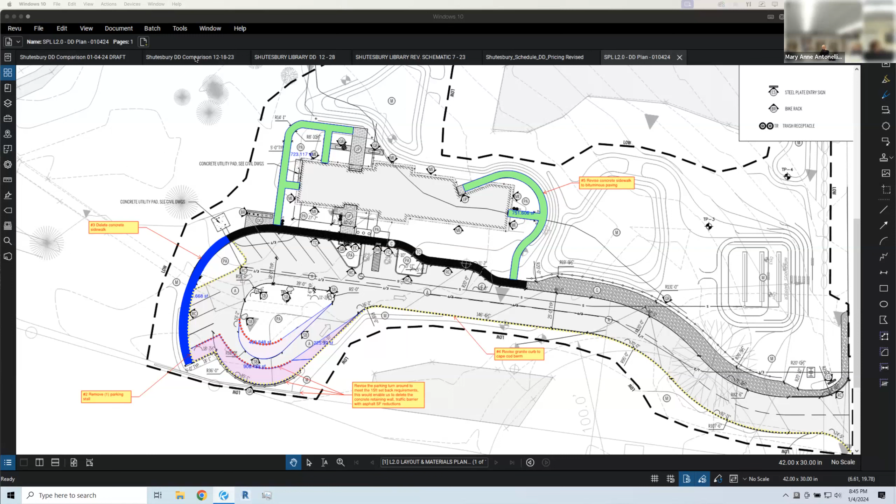Plus. And that's an eligible cost. Why did we take that out? The benefit of that is immediate. Absolutely not, I'm not taking that out. I'm just saying that if we run into issues, we need things in our pocket so we can build the building. I think that's not something we want to put in our pocket - that's a foolish thing.

There's the immediate problem of tenants paying for their electric. You're not gonna get those cells on the roof right away - that's not a viable strategy. You said it, you spoke it, it got voted down. Okay, well, that's it, don't bring it up.

Quickly, just to change the subject - Penny, back to your point about the job meeting room door, we would like to switch that out to a window. I think it would be great to have a window there. That's your decision whether we do or don't - if by code we don't need that door, it would be nice, on the south end wall. And how much of a savings would that give us?

I don't have that off the top of my head right now. Also, Dominic, if you did that, could you also move the condensers to the other side of the building so the conduit doesn't need to be as long?

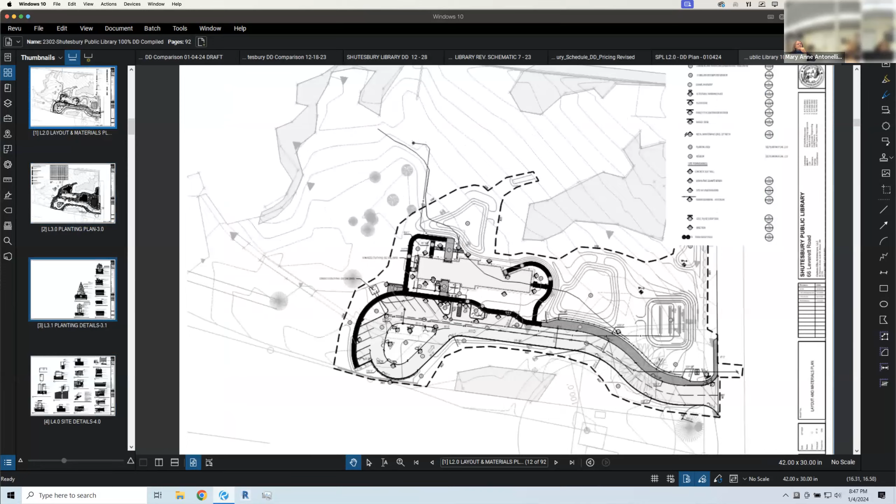I think any other location would be more visible. The best place to hide it... Well, I was thinking not on the south end, but on the west side, east side of the south end rather than the west side. Oh, think in this beyond corner? I think the whole side would be worse, in my mind. Yeah, there's not as much, because you can see it from the driveway, from the parking lot.

Yeah, I feel like, put it exactly where you have it, here. And then we're gonna put little fencing around it, and we're gonna plant, and nobody's gonna see it. You have to have 18-inch clearance.

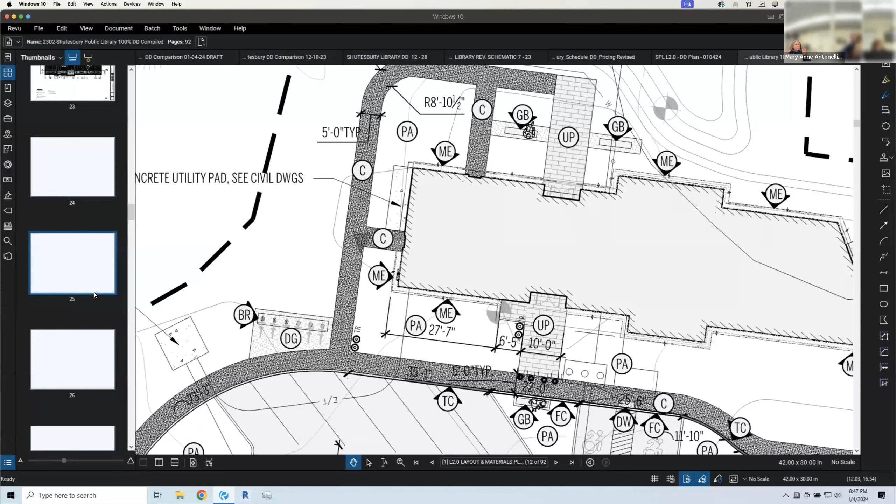Yeah, no problem. Dominic, can I ask you a question before you change that screen? Is this elevations or plan? The plan, yeah. It's related to the unit pavers at some of the entrances.

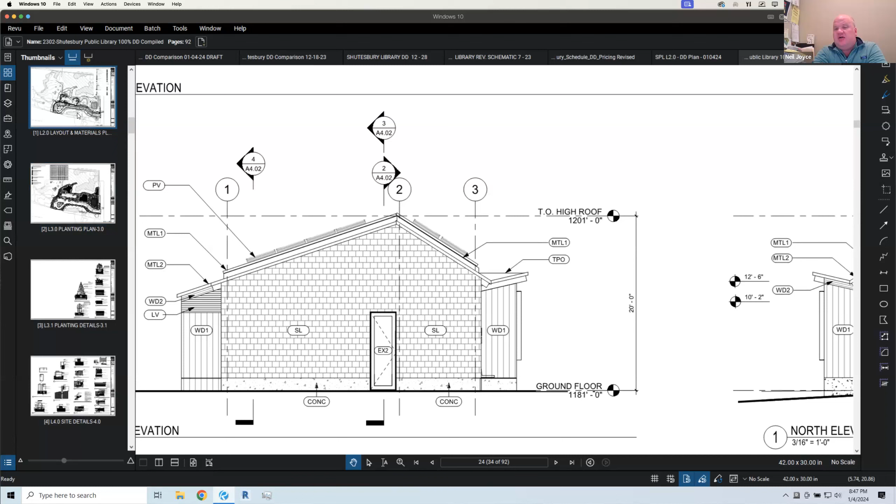What's the magic for the unit pavers? It seems like it has a much higher square foot cost than even concrete sidewalk, and certainly more expensive than bituminous. So is there a reason why we're hanging on to those other than aesthetics? I mean, it's $20,000 of, respectfully, low hanging fruit.

Unit pavers, where are those? That's brick, yeah, here and here. What if you just did it in the front and not in the back? We got rid of the two sides in the back.

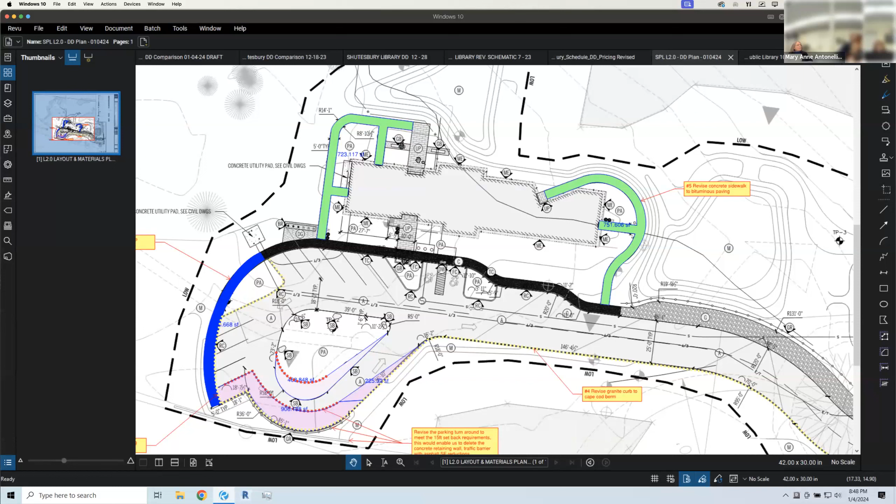Well, concrete pavers, okay. So this is our markup for landscape changes. So that's unit pavers back there beyond that back door. Couldn't that just be less expensive if it was just concrete, or make it asphalt instead? Everything in green is what?

We had talked at one point about doing those named bricks, but in the front. We could do them in the front. You could do the bricks in the main entry front and do asphalt elsewhere. If we're gonna do named bricks, we really gotta get on that, because we'd buy them all, and then you can buy the bricks and have the names engraved after the fact.

I just had a question about the pavers, because sometimes they require you to have pervious pavers around, so you might not be able to change it out to another surface that may not allow for that. I think that's another item we want to try. Yeah, it's a good question, Andrea.

I agree on pavers out the front, but not out the back, are you saying? Yeah. I'm trying to think, Andrea, whether that's a LEED requirement that we may not need to meet here. Off the top of my head, but I do need to confirm that. So let me raise that with the landscape architect as another potential. Neil, I think there's room there.

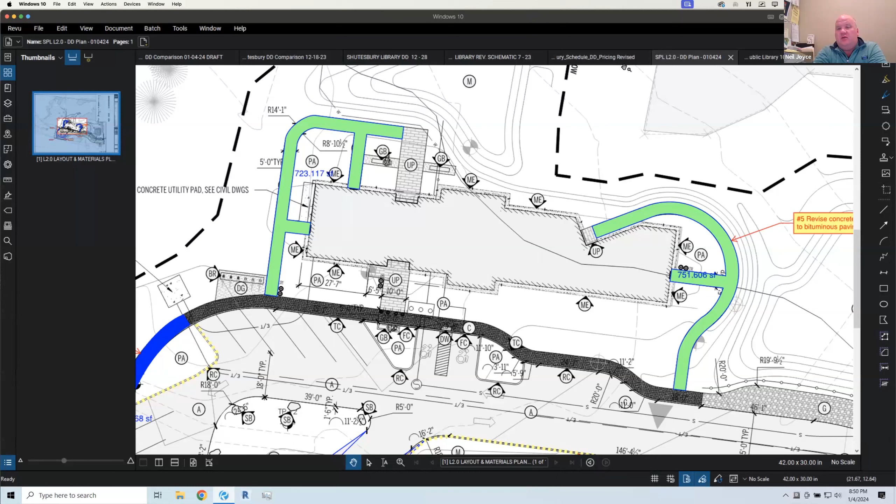The other suggestion, Dominic, which I know you're looking at, is to eliminate the acoustic drywall in favor of other acoustic treatments that will achieve the same performance. I don't want to speak for the MBLC, but there were questions on the performance of that product on other projects, which have come back somewhat unfavorably. If this requires a level of expertise to install that may not be present in the greater Shutesbury area in order to do it right, then I think we should seriously consider not inviting a headache that we can avoid.

You raise good points. In the difficulties we've seen in certain spaces previously, we installed perforated gyp in that location. This is acoustic drywall, not perforated, and it has a simpler assembly as well. It's direct, and it's more than double the material cost. And yes, I agree.

We are investigating an alternative here. I realize that it's not a full swap—we do have to do some acoustic treatment—but fabric wrap panels are very effective and I think much less expensive than what we're looking at. Plus we have all of the baffles in the ceilings that are presumably remaining within the scope of the job. So I think there's some work we can do there.

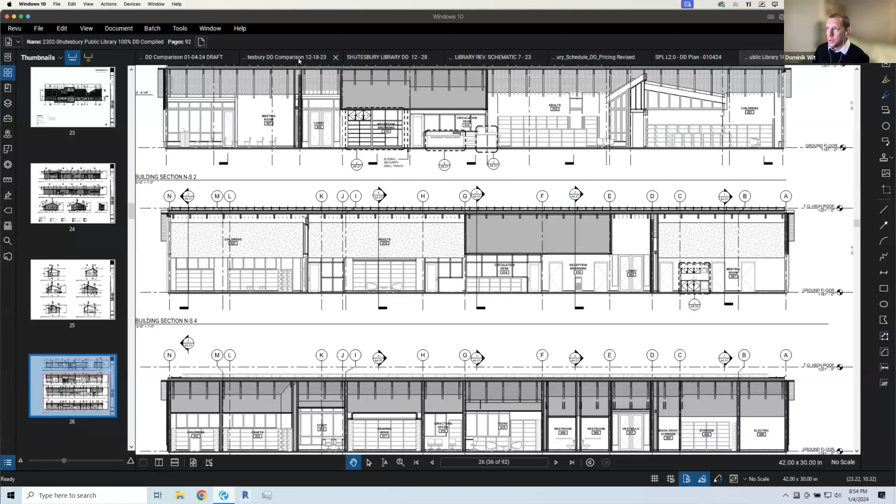I guess what's unclear is that there's additional VE going on, or there is an investigation for numbers. By my numbers, I'm over by $10,000 of the 6.2. And for your project budget, you need an additional 120,000.

I would argue that there's only one budget, and it's the total budget, and it should be within the parameters that were established by the town at the end of SD. And we're not there yet. I think there's a pathway there. And what I would expect is that if we continue the VE effort, that the town is not asked to entertain additional cost to incorporate those VE efforts as we're moving forward. To be somewhat direct.

Right. So I appreciate that your ball is already rolling down the hill. I get that, that's right. I'm understanding of that completely. Right. So we—

completed DD with the understanding that the 6.2 million was our construction budget. That's not good enough for the project, as we find out now, right? Or as of last week was the first that we heard of that. So because some things were left out. Well, something was left out. So here we are, it's almost 9:00.